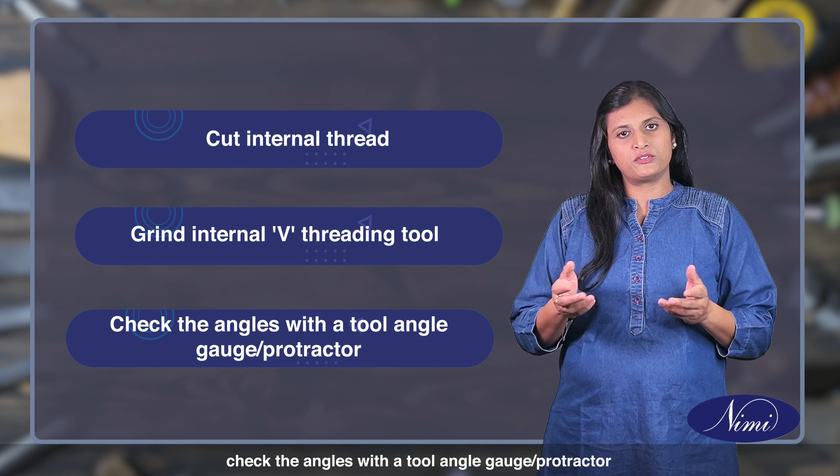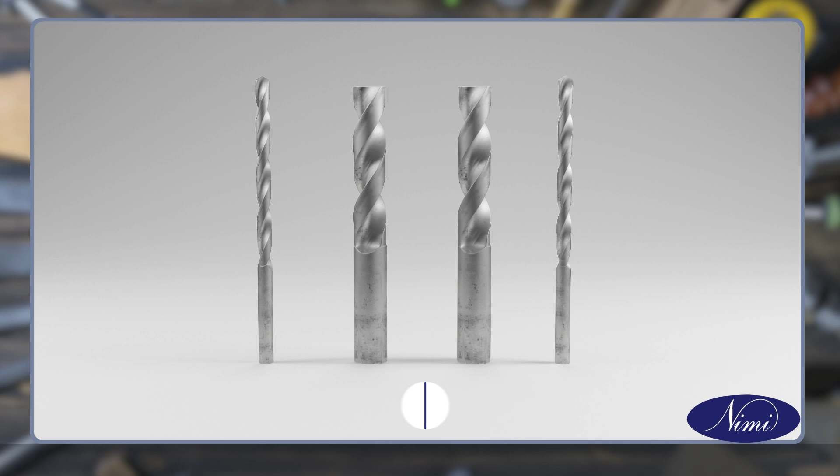Materials and equipment: tapping tool or tap, tap wrench or tapping handle, cutting oil or lubricant, drill bit, screw pitch gauge.

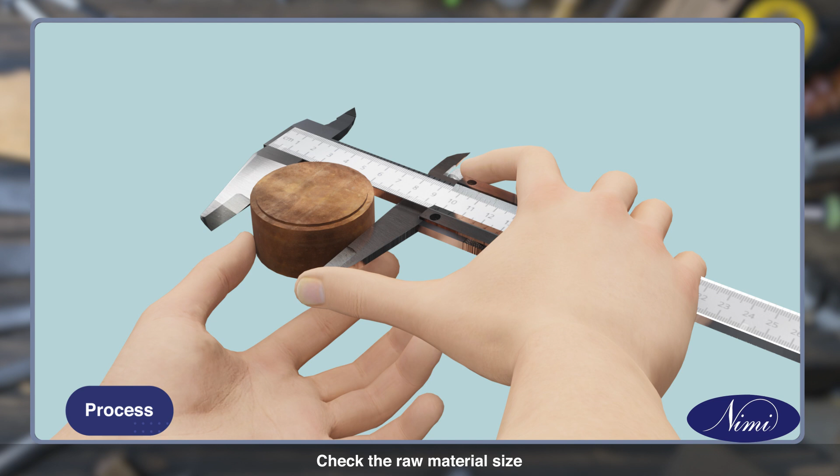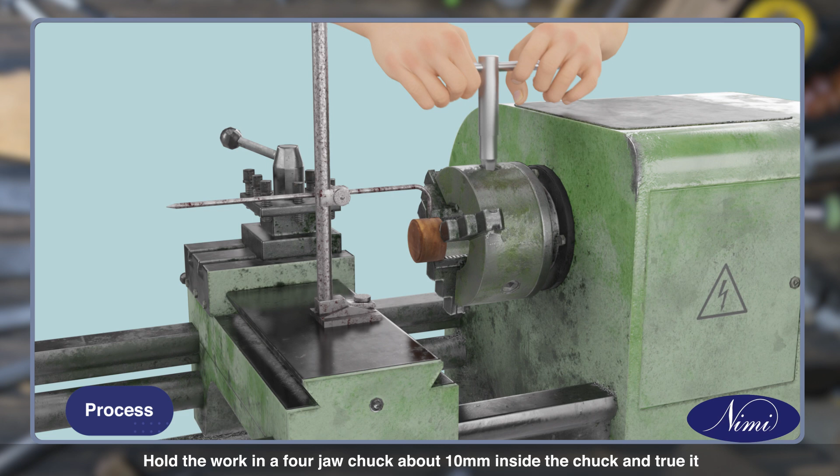Process. Task 1: Cutting internal thread. Check the raw material size. Hold the work in a 4-jaw chuck about 10 mm inside the chuck and true it. Face the one end.

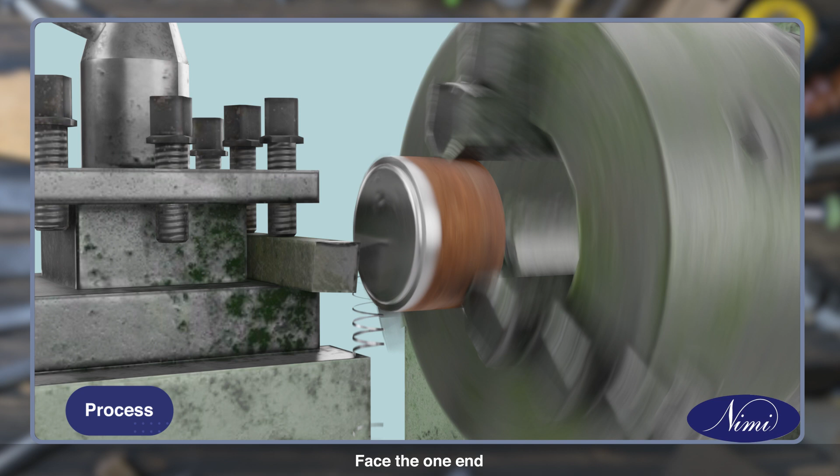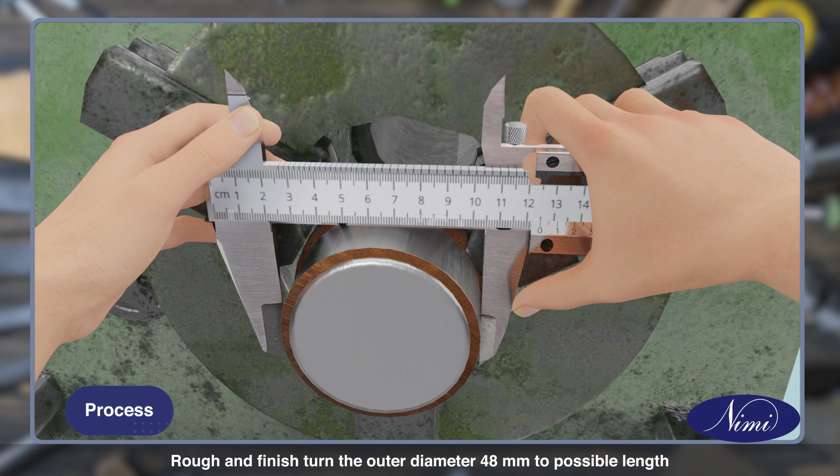Rough and finish turn the outer diameter to 48 mm to possible length. Chamfer 2 into 45 degrees on the outer edge. Drill and bore the hole to the core diameter of the thread.

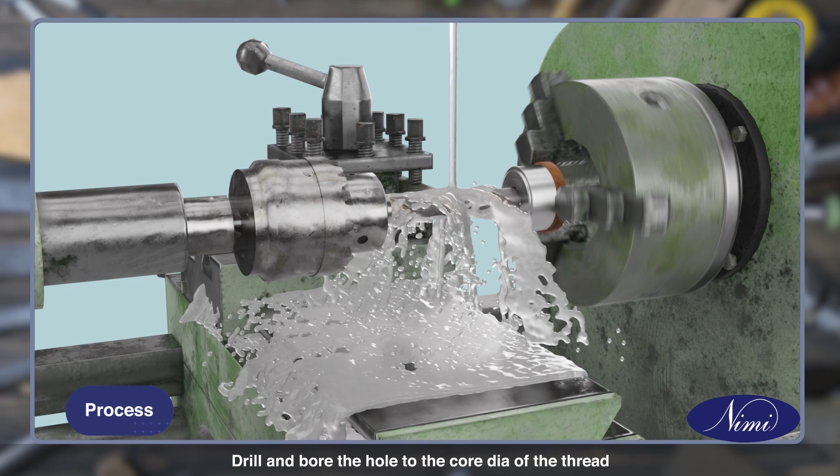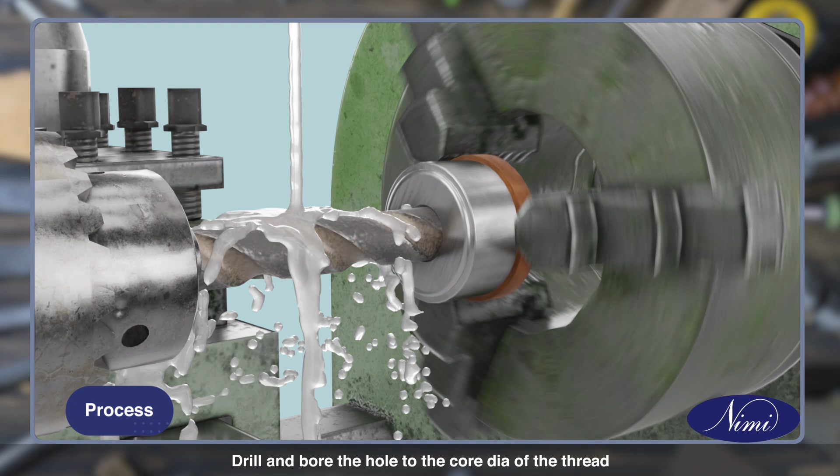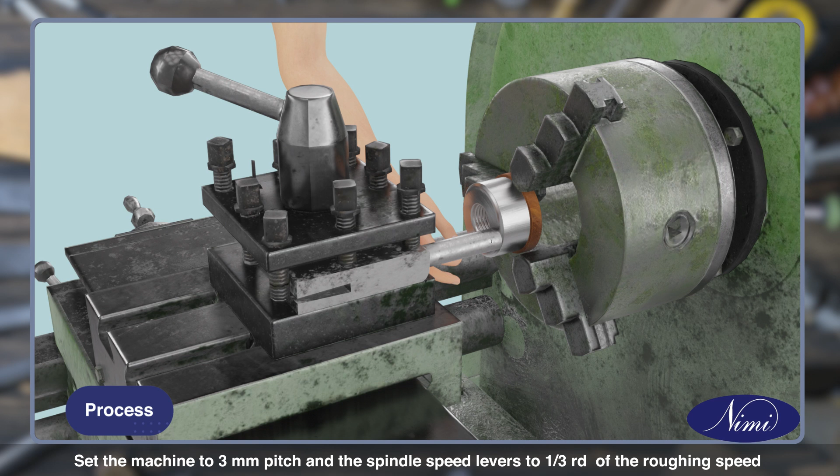Fix the internal threading tool in a tool post and set it with the center gauge. Set the machine to 3 mm pitch and the spindle speed levers to 1/3 of the roughing speed. Touch the tool tip to the bore surface and set the cross feed graduated collar to 0.

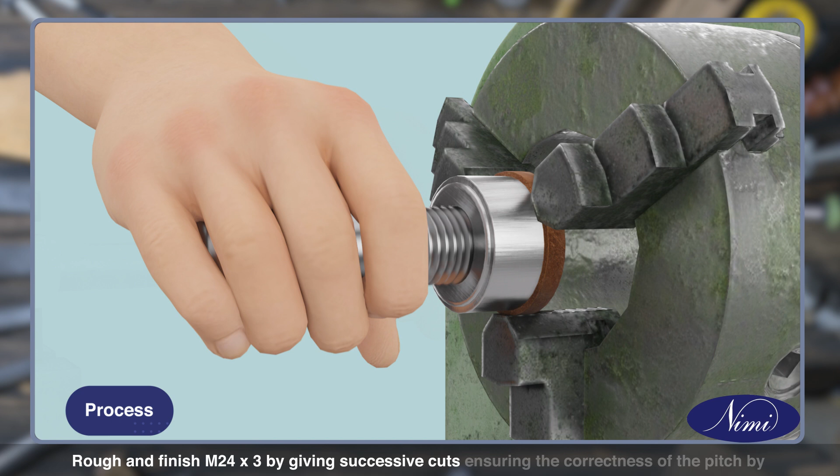Rough and finish M24 x 3 by giving successive cuts, ensuring the correctness of the pitch by checking with the pitch gauge. Reverse and hold the work on diameter 48 mm and check its run out.

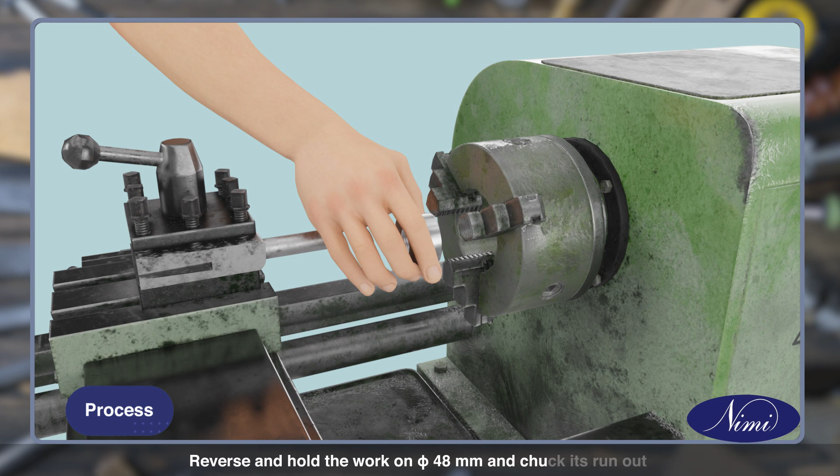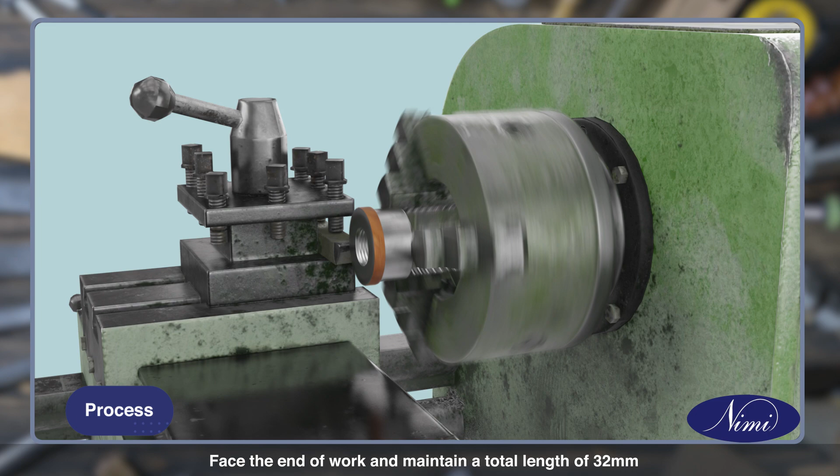Face the end of the work and maintain a total length of 32 mm. Chamfer 1 into 45 degrees on the outer edge.

Task 2: Grinding V tool. Prepare the pedestal grinder for grinding a threading tool.

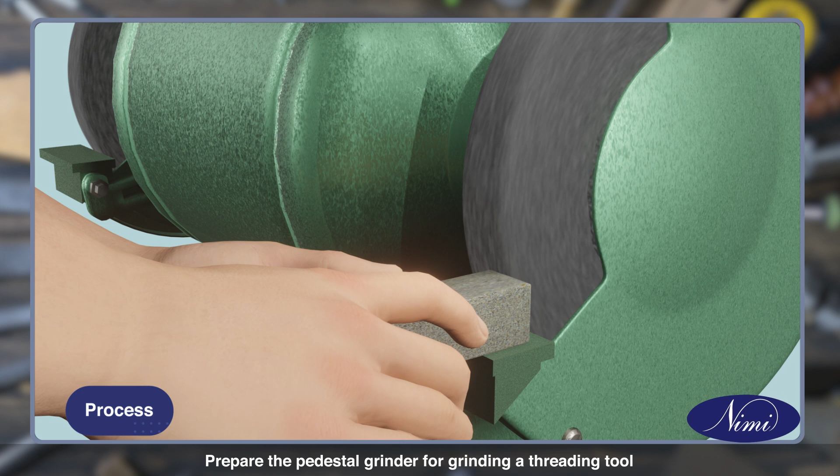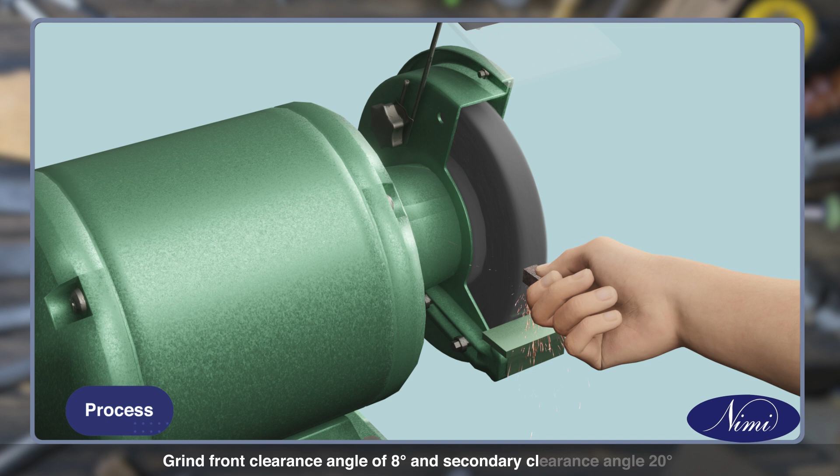Grind front clearance angle of 8 degrees and secondary clearance angle of 20 degrees.

Grind a side clearance angle of 5 degrees and a thread one side cutting angle of 30 degrees. Grind the other side clearance angle of 95 degrees and thread cutting angle of 30 degrees.

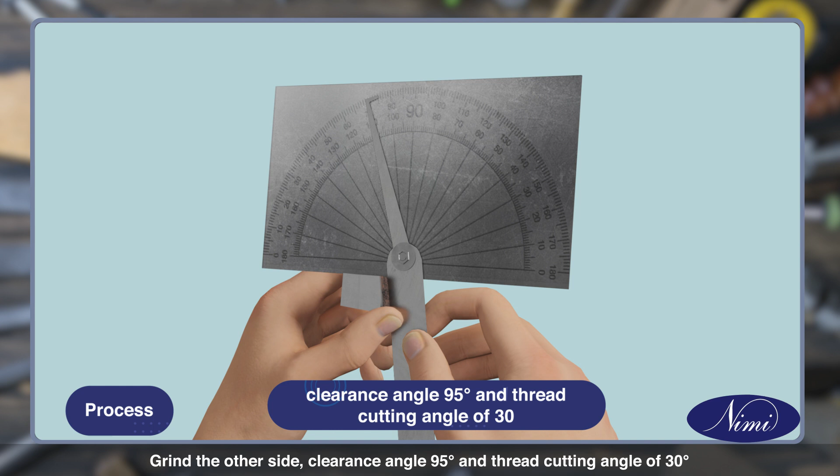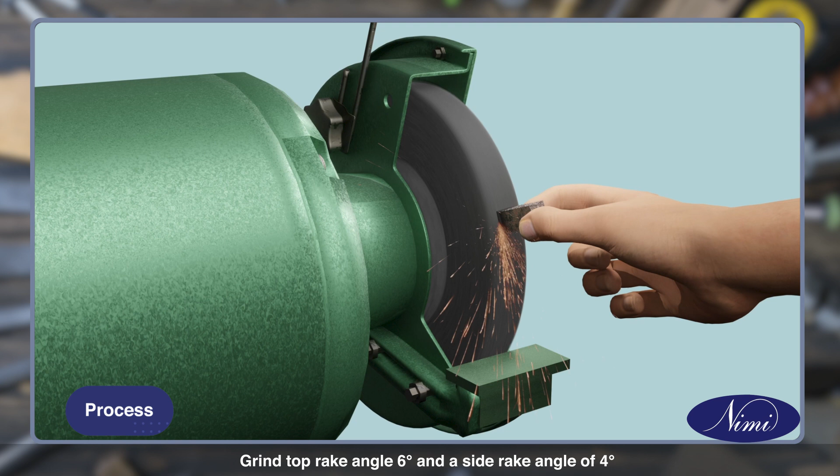Grind top rake angle of 6 degrees and a side rake angle of 4 degrees. Maintain a nose radius of 0.3 to 0.5 millimeters. Deburr with an oil stone.

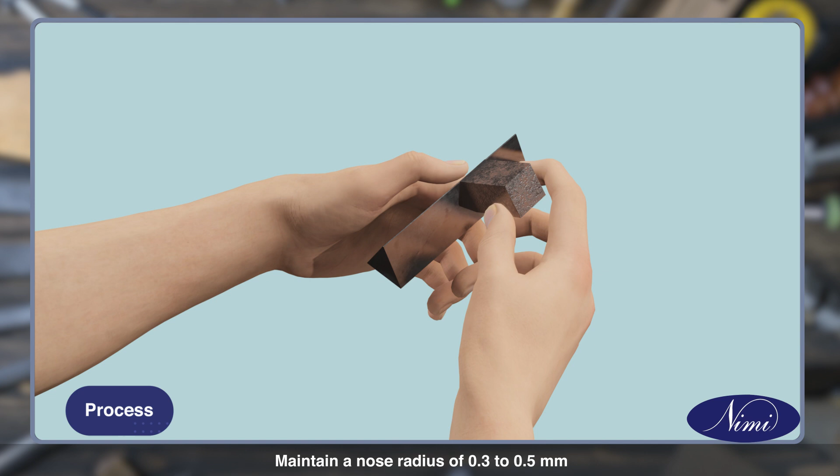In this video, we learned about how to cut internal thread, how to grind internal V-threading tool, and how to check the angles with a tool angle gauge or protractor. I hope you have understood all the concepts and exercises.